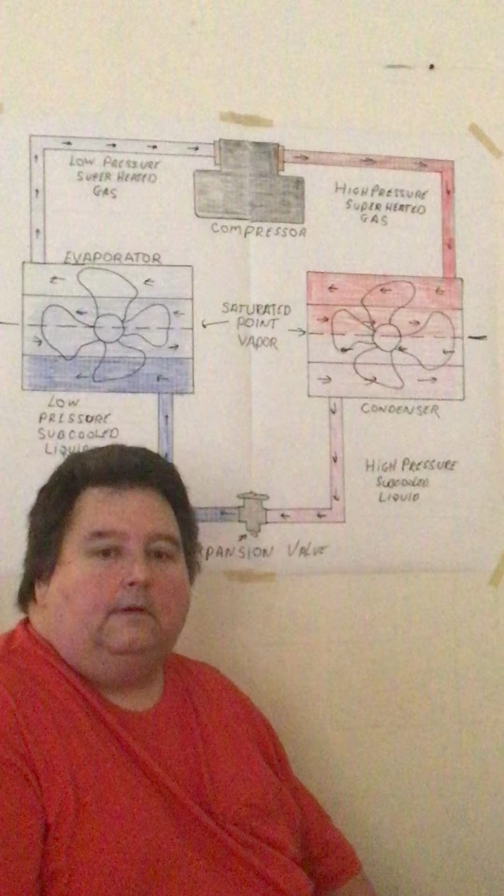This is a very basic refrigeration cycle. There's other things that can be added to the unit, to the system, but right now I'm just going to go over the very basic.

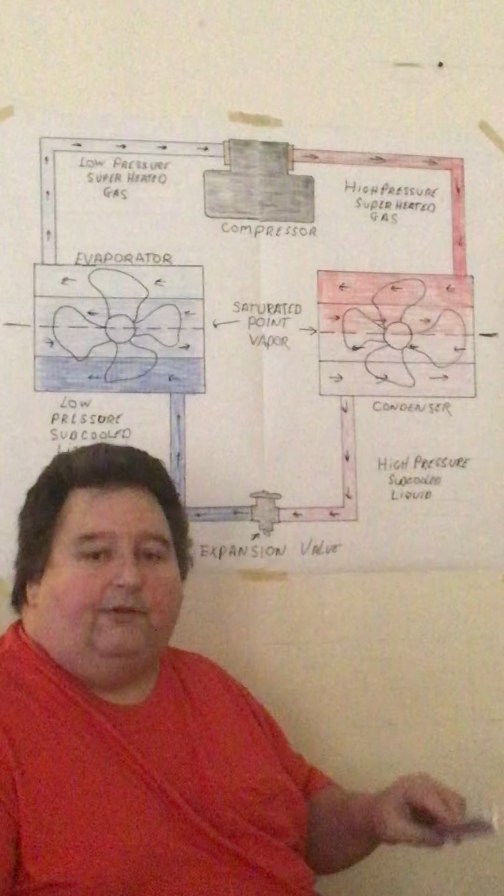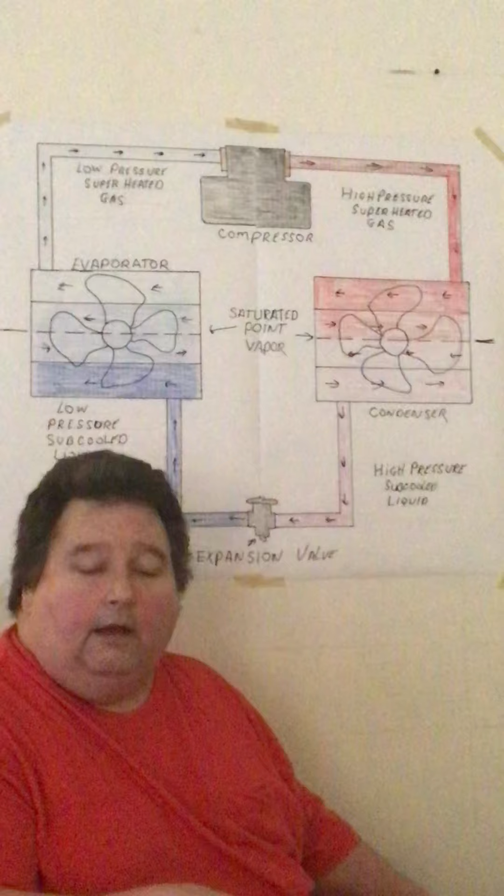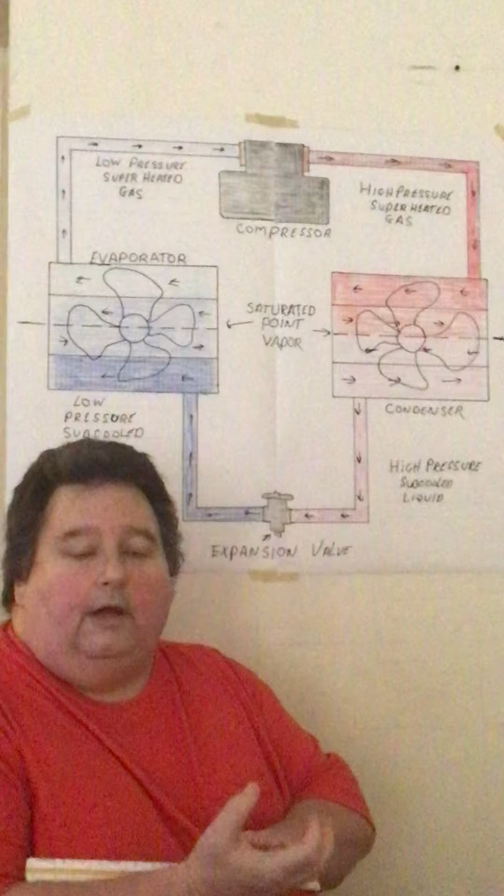So what I want to do first is tell you that there are four basic components to the refrigeration cycle: the compressor, the condenser, the evaporator, and the expansion valve or metering device.

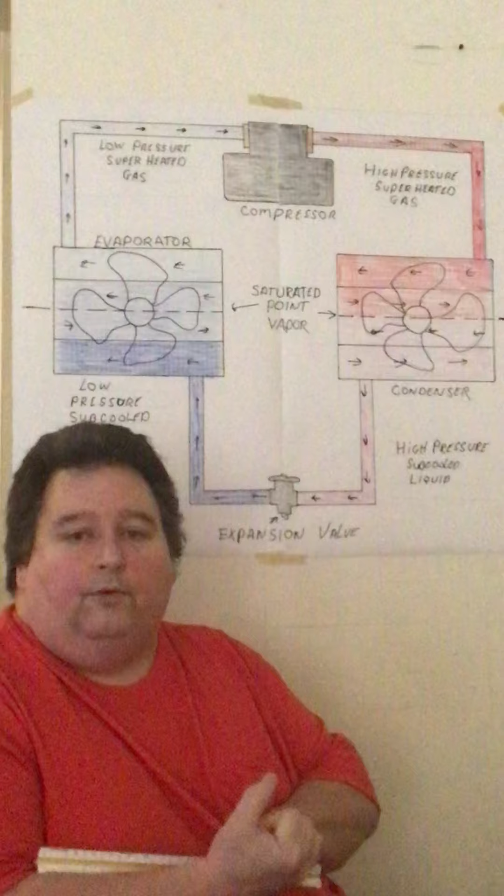The main part of refrigeration is the compressor. The compressor is like the heart of the unit. It pumps the refrigerant through the coils all around the system. Without the compressor pumping, the system is not working.

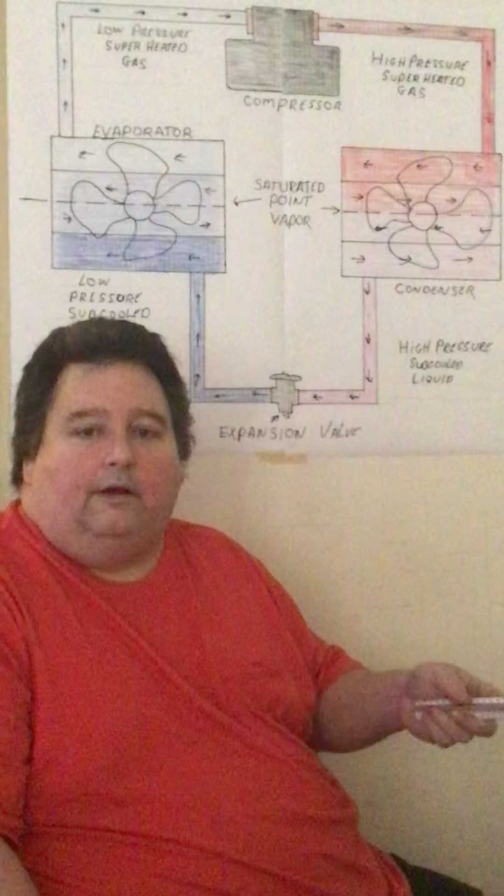So I'm going to start off with the compressor, which I drew up. I'm no artist, so forgive my drawing, but this is the compressor.

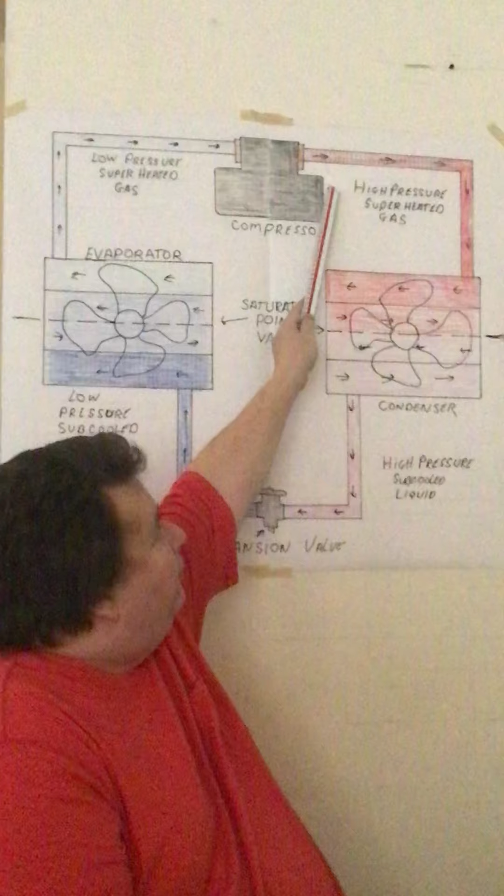On the outlet of the compressor, you have a discharge line, which gives you a high pressure, superheated vapor or gas. That's the state of the refrigerant.

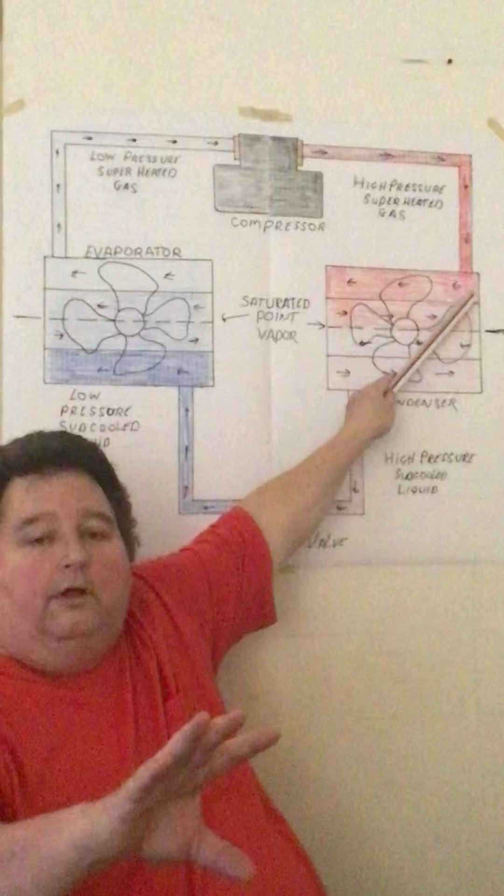As it goes through the discharge line, it enters the condenser. The condenser's main purpose is to remove unwanted heat out of the refrigerant.

So it comes in the condenser, through the condenser, and as it's going through, there's a fan, and the mechanical means is blowing the air across the coil.

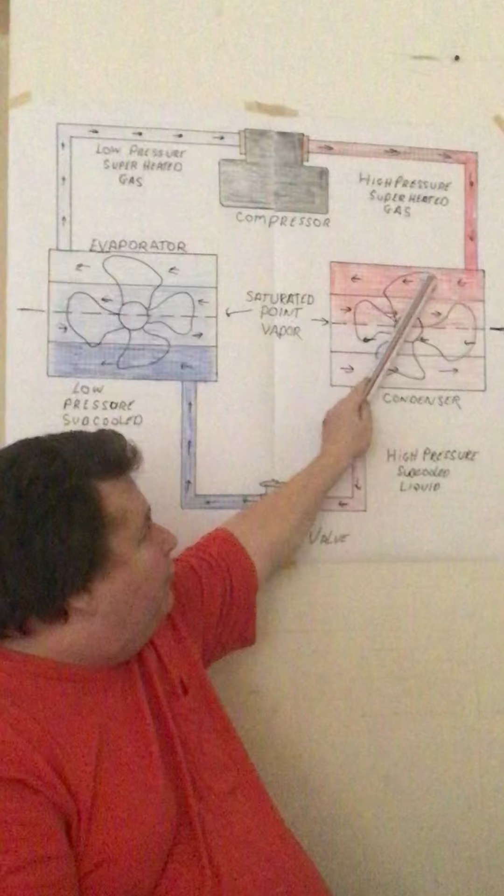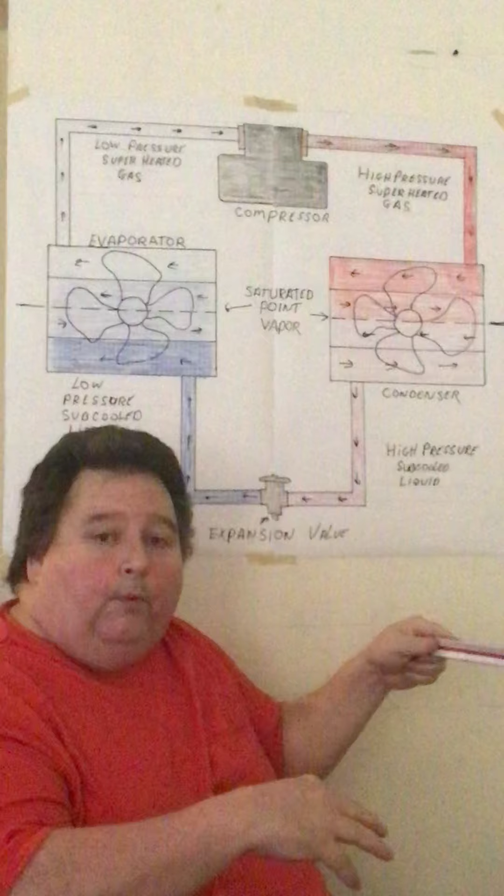As it comes through, what's happening is the refrigerant has a boiling point. All different refrigerants have different boiling points, which is the saturation temperature. So at this point right here, like I drew with the line, it's a saturation point, the point where liquid and vapor exist together in the refrigerant.

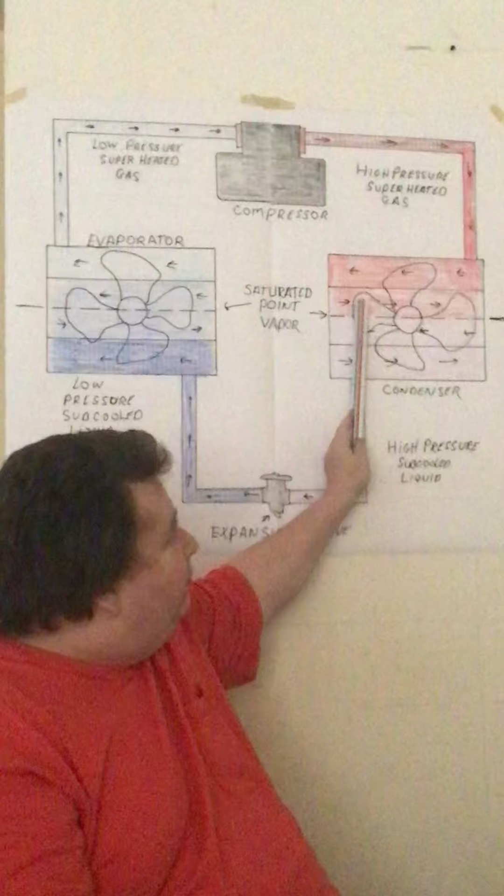So it's coming through here, and as the fan's going, it's boiling off. The refrigerant is boiling off. It keeps going down the coil, and the fan keeps blowing, removing more heat.

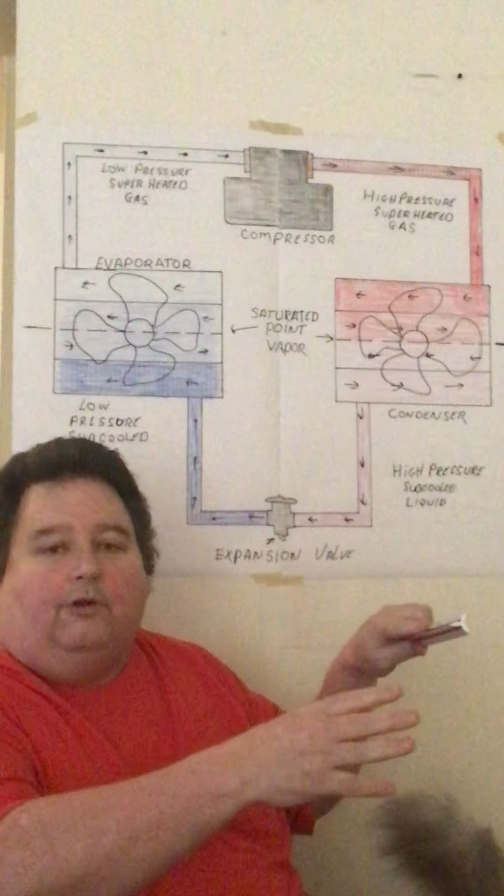That's called subcooling. Subcooling just means the saturation temperature minus the temperature of the refrigerant. You're subcooling it. You want to subcool the refrigerant.

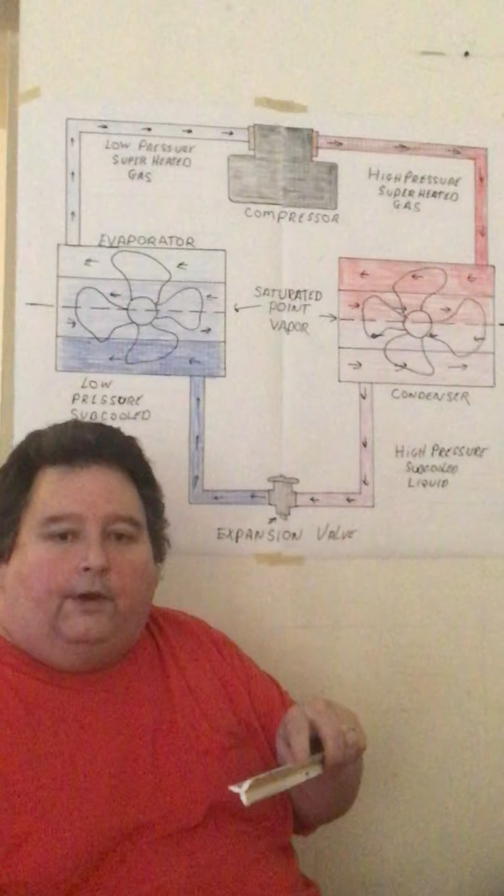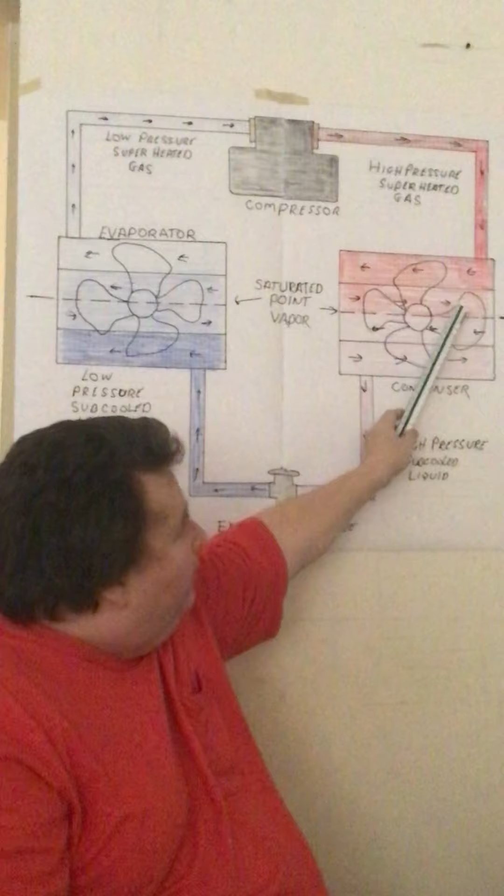The reason you do that is so you get full liquid. You want full liquid right here coming out of the condenser. So you have vapor coming in, superheated vapor, and it'll condense, it'll boil off.

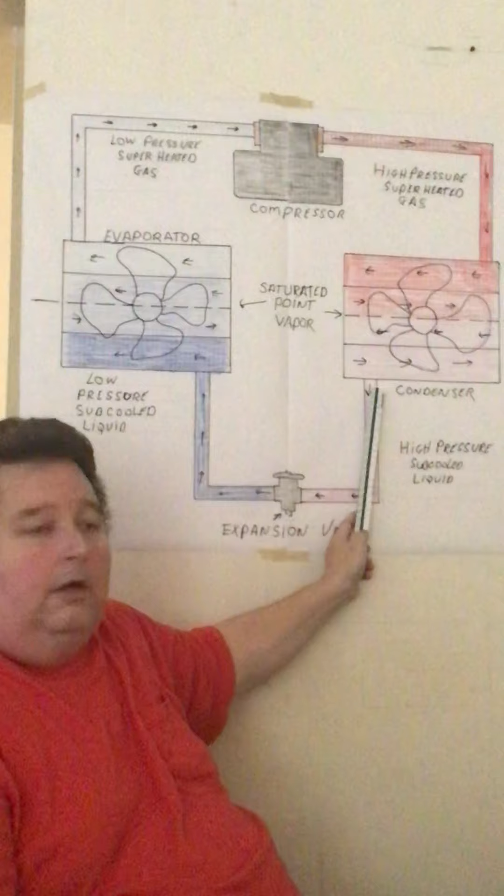With subcooling, it'll become a liquid, and as it comes down, it keeps producing subcooling temperatures of the refrigerant. So that guarantees that you have pure liquid coming down and going into the liquid line here, which is called the liquid line.

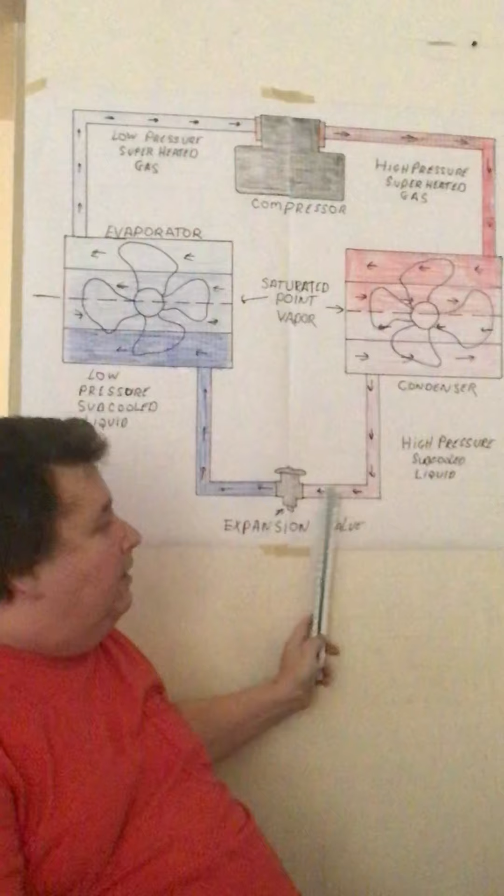It comes in here to the expansion valve. Now right in here, I didn't draw it, but all units have a filter dryer. The filter dryer's purpose is that when the refrigerant goes through it, it goes through screens.

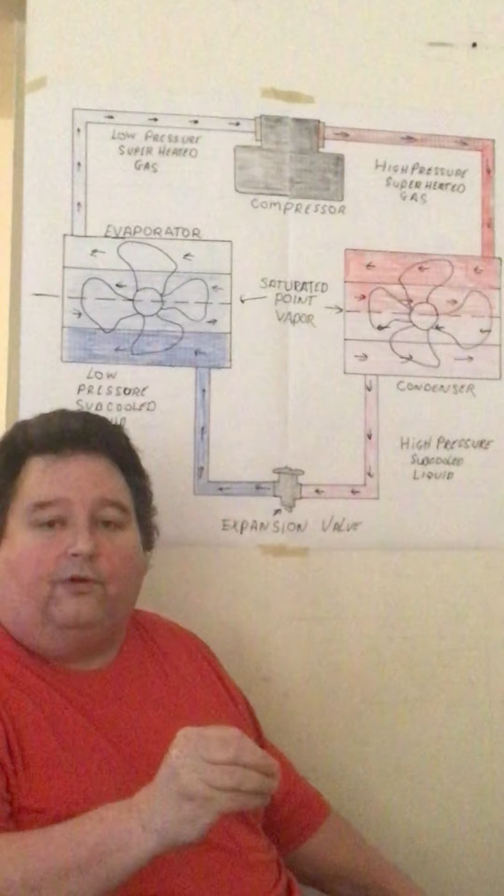What it does is clean the refrigerant and take all the little tiny particles out. It's almost like an air filter on your air conditioning, but for the refrigeration system, cleaning the refrigerant to make sure there's no particles.

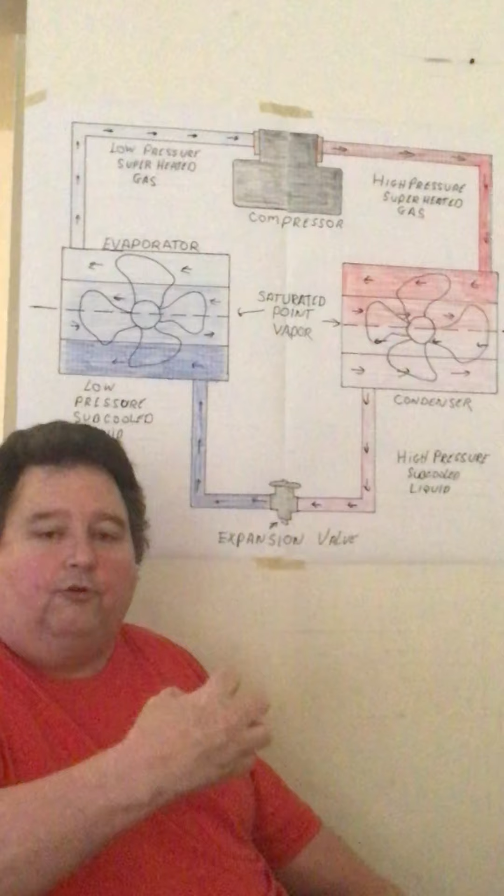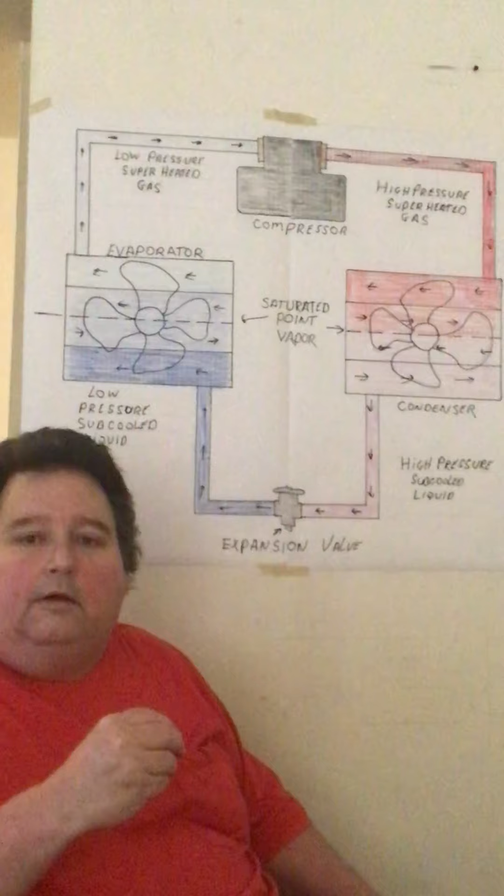Because what happens is if it goes through the liquid line here, and it enters the expansion valve, you don't want any sediment, because in that expansion valve there's a little orifice, or in the capillary tube system, the capillary tubes are very tiny.

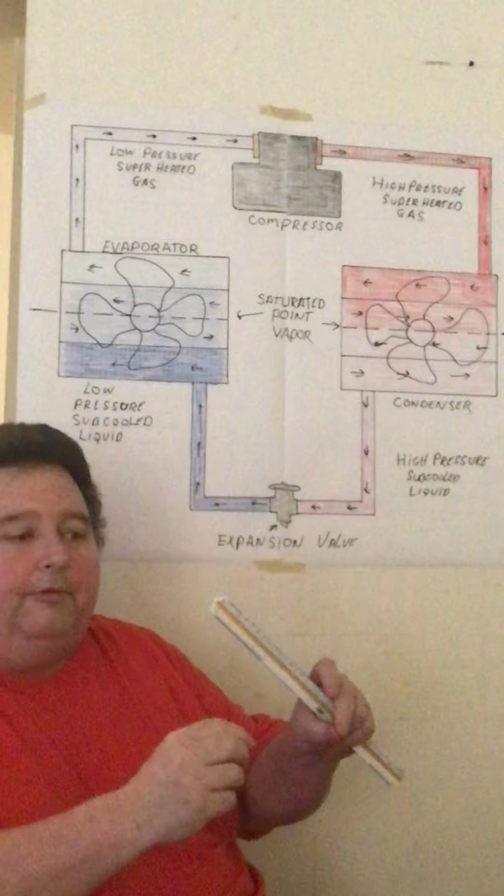So this here, the expansion valve or the metering device, this is where the refrigeration takes place.

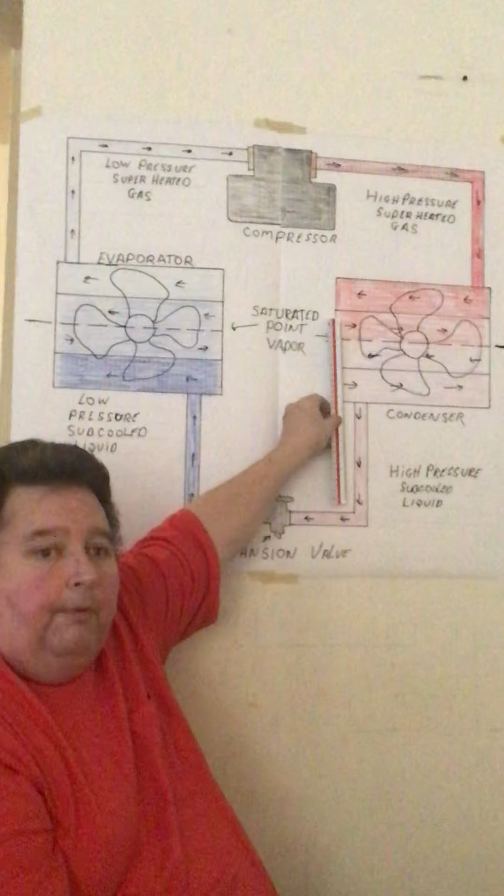This side here is your high side of the system. This is high pressure liquid and high pressure vapor. The expansion valve right here in the middle is the dividing line.

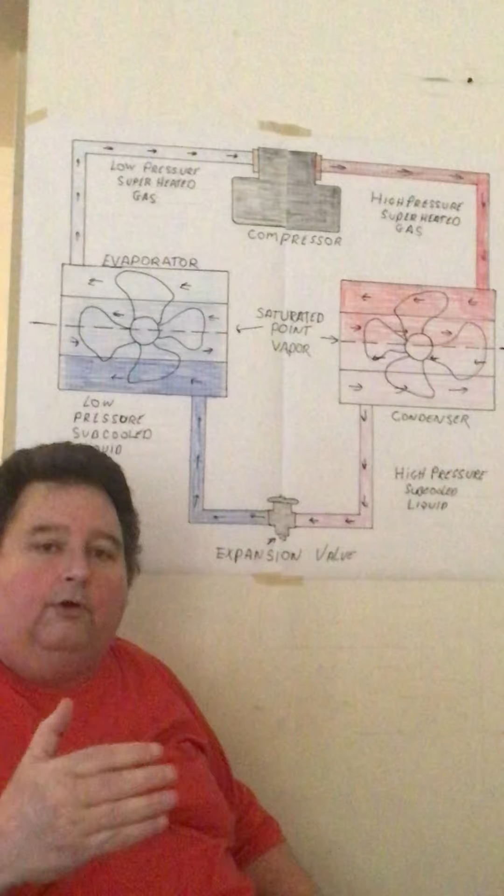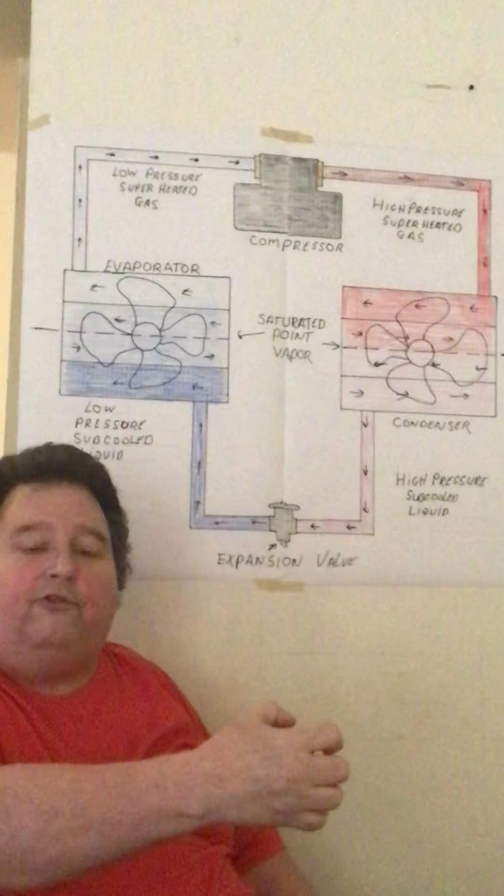This is where you change a high pressure into a low pressure, done with the restriction of refrigerant. Think of a garden hose: when you squeeze the nozzle, it spurts out real fine. That's the same thing happening here.

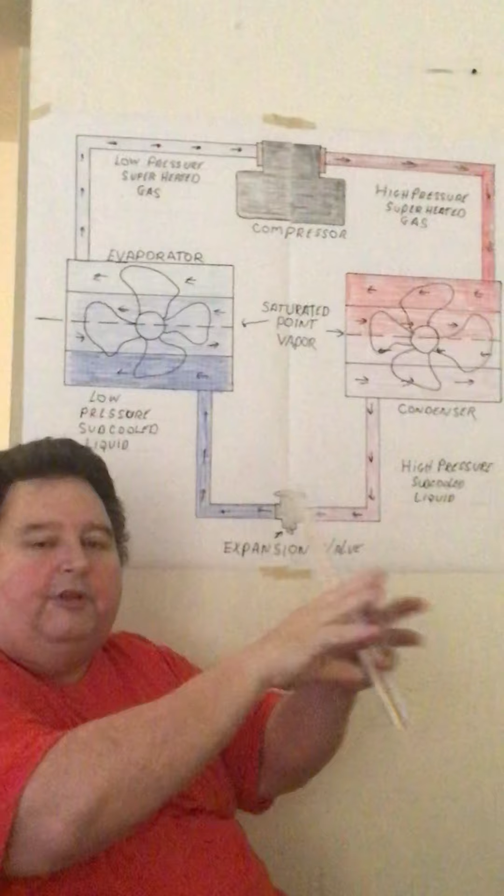It's taking the refrigerant, all the liquid droplets and everything are going in there, and comes in through here. Just remember, this is high pressure here, and the other side of the valve is low pressure.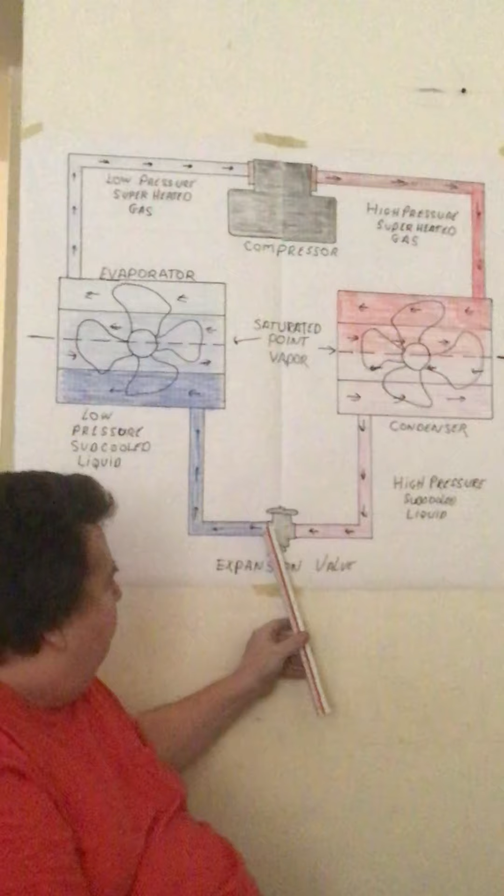So now you have low pressure, low temperature, and this is still liquid right here. This is a blue line, cool to the touch, and it's liquid. That's because of the restriction here in the expansion valve.

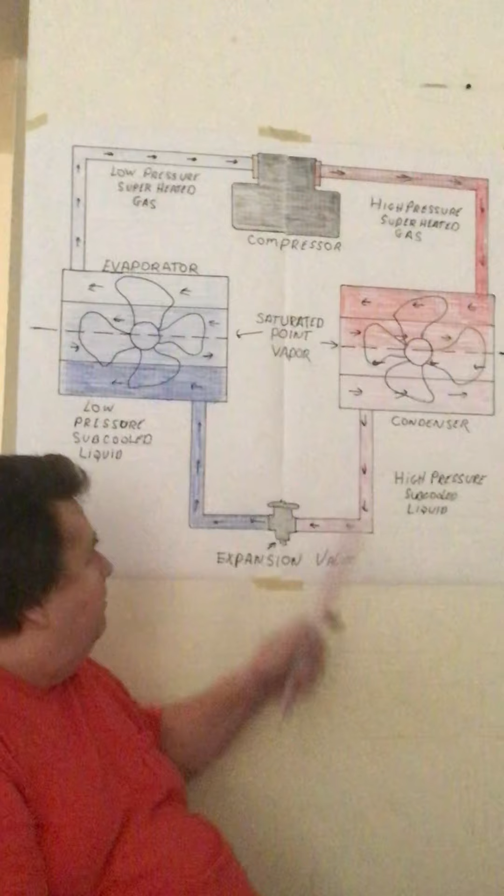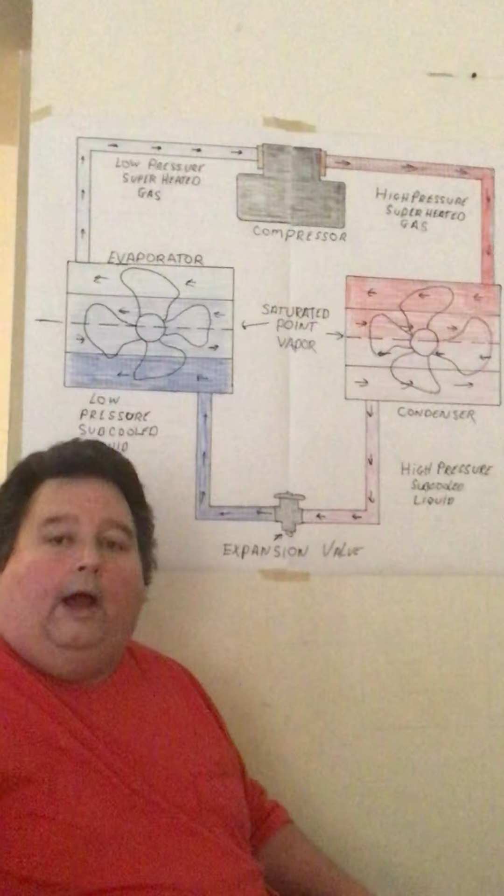So the line comes in through here, all the way around, and it goes into what right here is the evaporator. The evaporator is where all the cool refrigerant is that makes your refrigerator box cold or your house cool. That's what gives the cooling power of the refrigeration or the air conditioner.

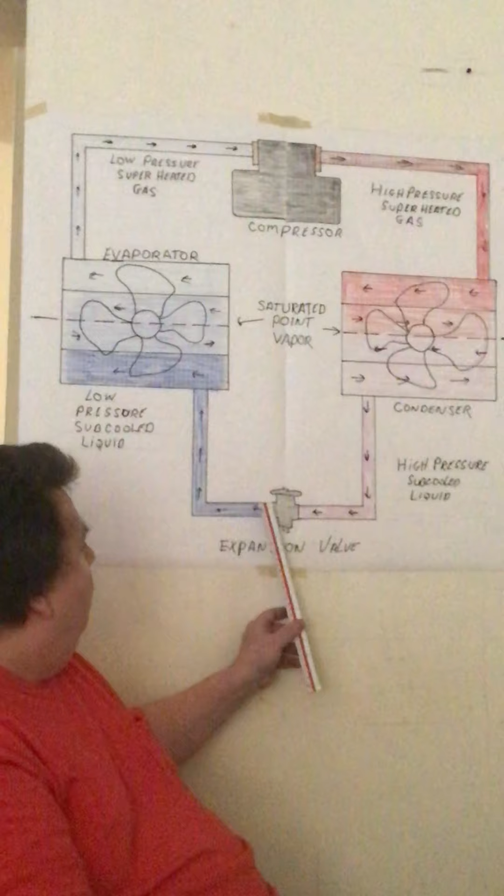It's all done with this little valve here. So this is all low pressure, low temperature, but still it's a liquid. So the liquid comes into the inlet of the evaporator, and it travels.

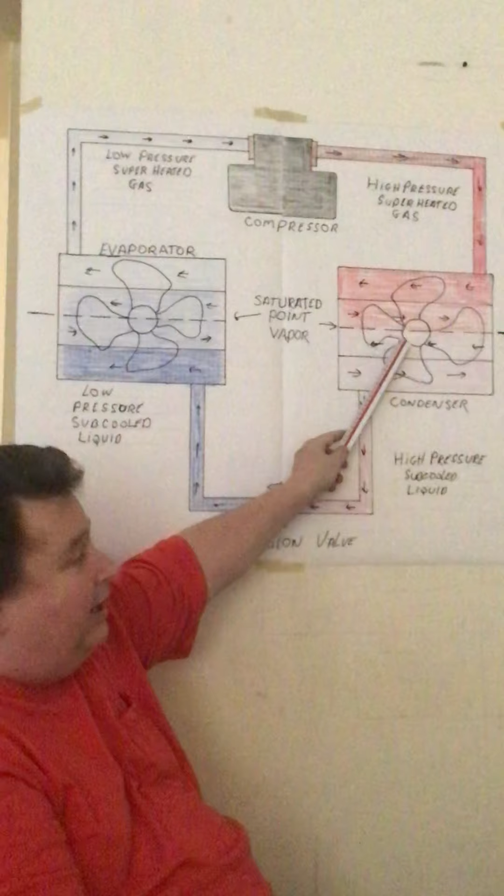It comes through, and look what you got here, you got a fan. So the fan in the evaporator is doing the same thing it does in the condenser. But here, what you're doing is you want to superheat, you want to add heat to the refrigerant.

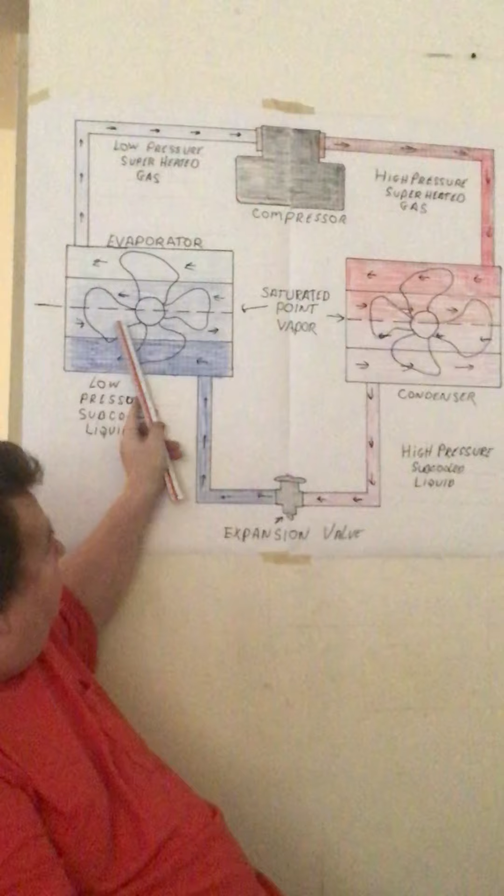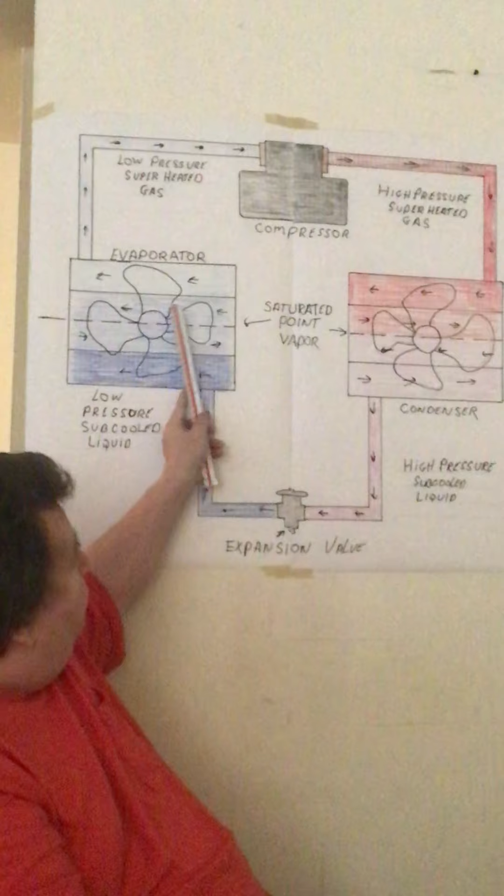So what's happening at the saturation point of the refrigerant is it's boiling off. Because of the fan, the refrigerant lines are absorbing heat from the ambient temperature around the coil. In this section, the refrigerant is boiling off into a vapor, going through the coil, all the way up. Right now you're at vapor.

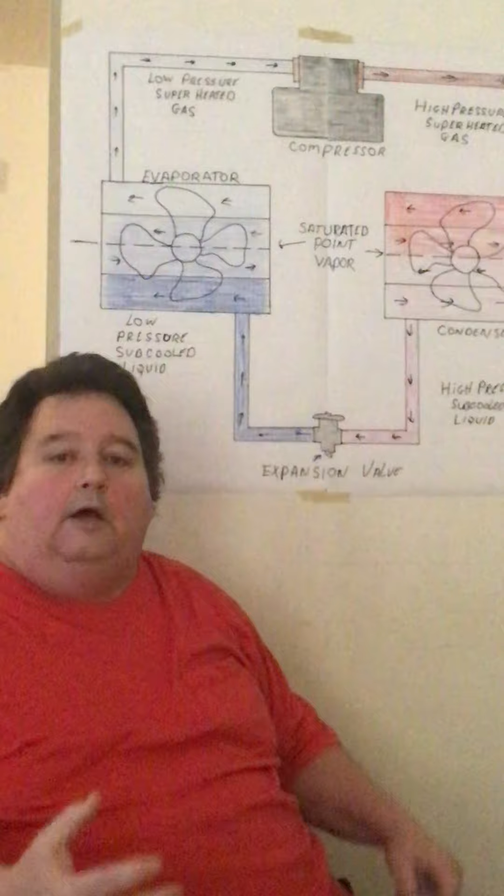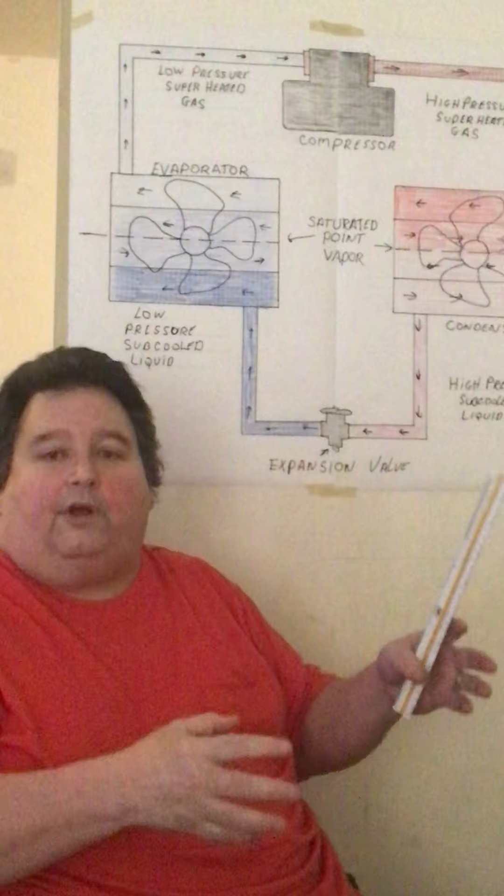You have vapor. Now the tricky and most crucial thing is that you have to superheat the refrigerant. By superheat, I mean you need to add heat beyond the boiling point of the refrigerant. Later, when we discuss temperature and pressure, this will make more sense. But for now, you boil it off and you have vapor.

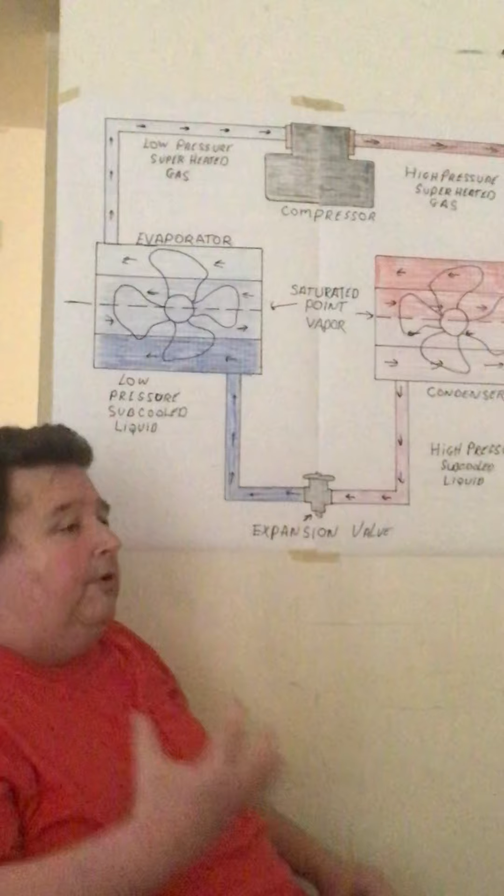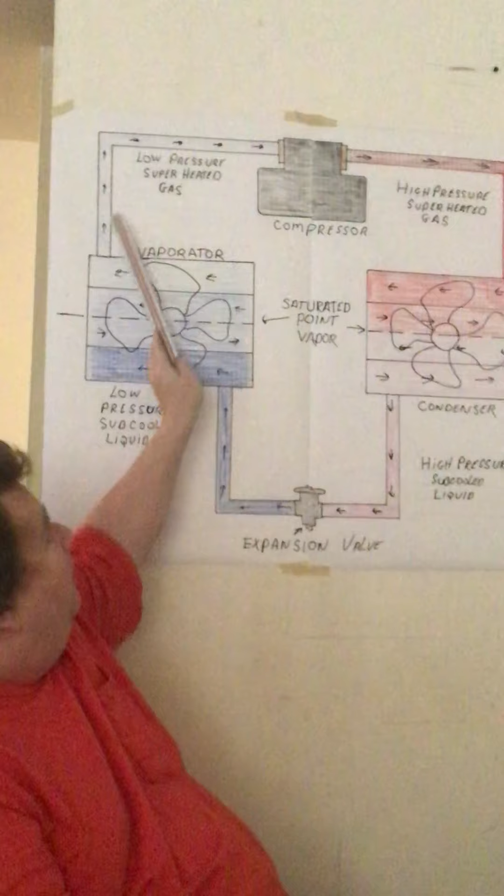As the refrigerant goes, you keep gathering more superheat. You don't want too much superheat, but you have to have enough that this is vapor. It comes out of the evaporator into the suction line as a low pressure, superheated gas, and travels through the suction line all the way back to the compressor as a low pressure, low temperature, superheated gas.

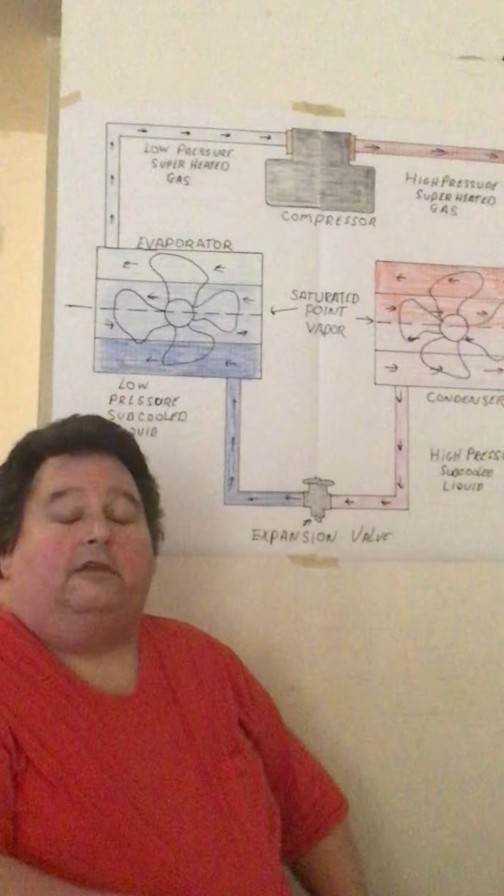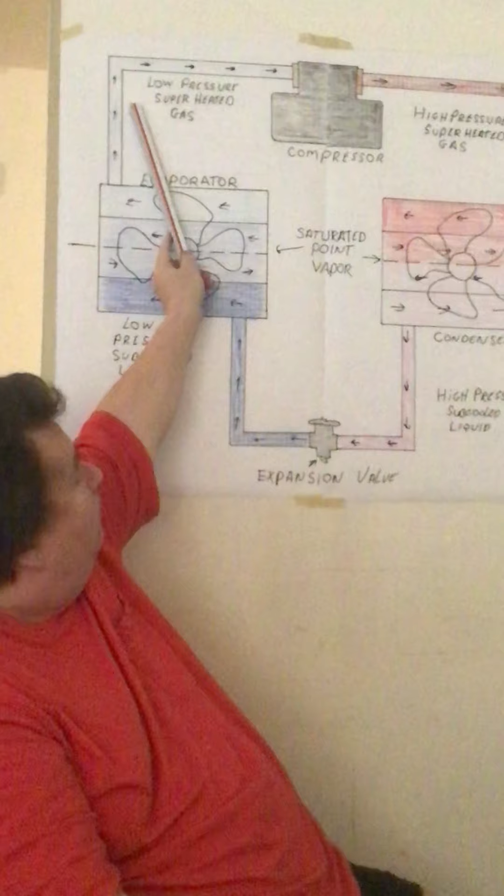The thing about superheat is you need it because you don't want any liquid refrigerant going back to the compressor. That's one of the worst things that can happen. If you have too much superheat, the compressor is going to overheat because you're not getting enough refrigerant back, since the refrigerant is actually what cools the compressor down.

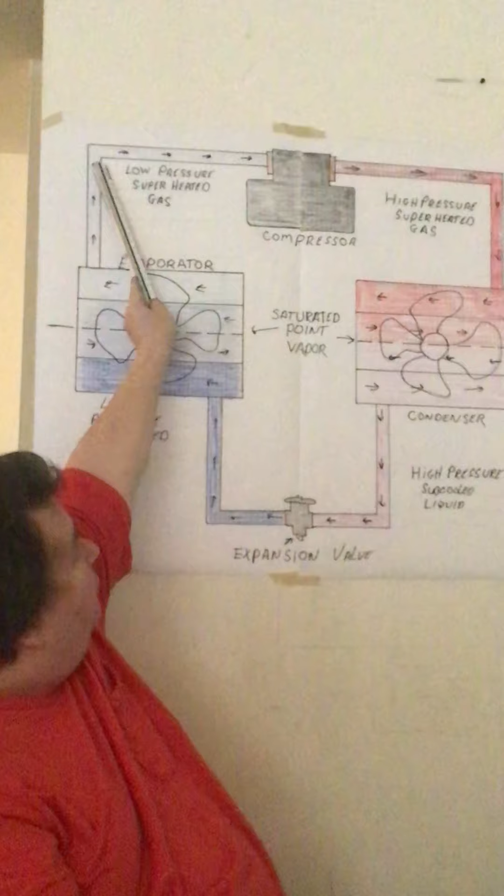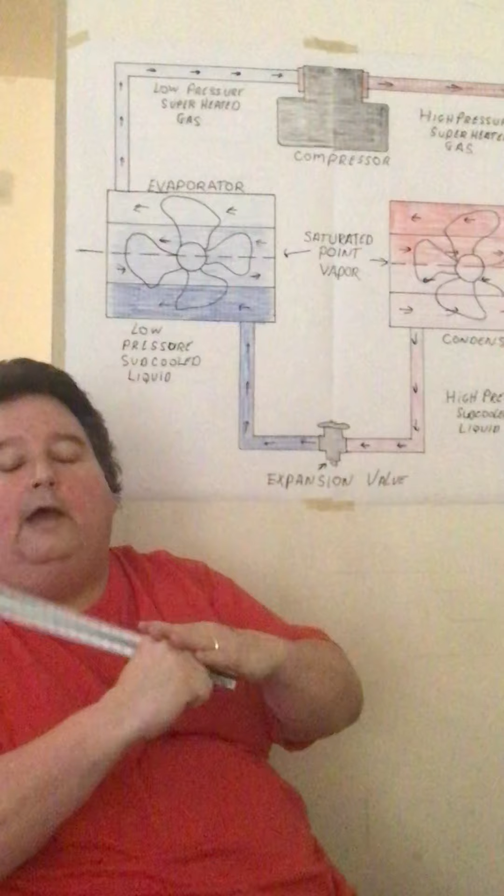So if you have too little superheat, you have too much liquid, and instead of vapor, the liquid level will be too high. That liquid is going to go into the compressor, and that's called slugging, which is no good. The compressor has pistons with two valves that go up and down like in a car. If liquid goes in there and the piston tries to compress it as pure liquid, you're going to damage the valves, and also the piston, but mainly the valves.

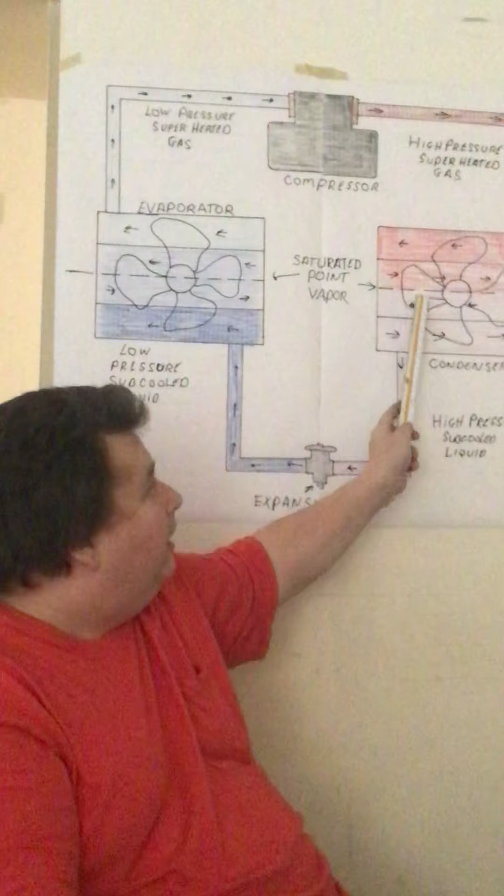So it's very important, and we'll go over this in more detail when we start the lessons, that subcooling and superheat are very important in diagnosing a unit. When you put your gauges on, you can see inside the system, reading the pressure and temperature of the refrigerant. It's almost like a doctor's x-ray, seeing inside the system what it's doing at the condenser and the evaporator.

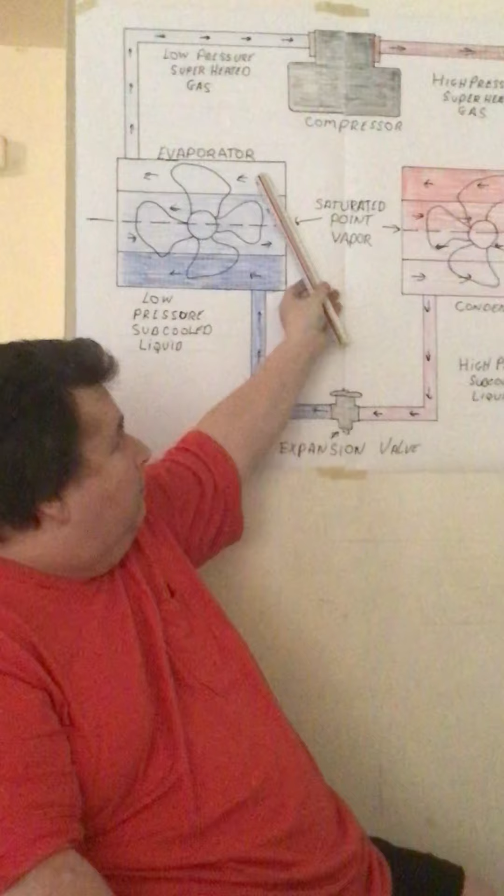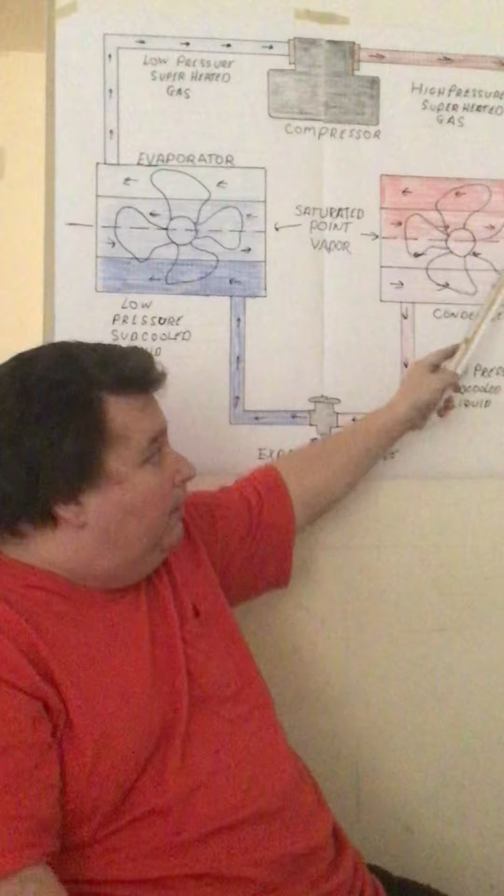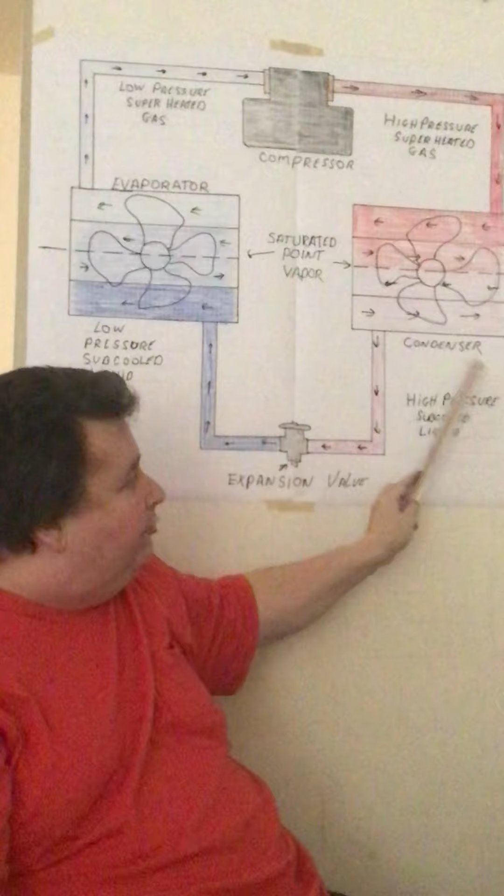Too little refrigerant or too much refrigerant is bad. If your fan motor goes bad, or you have a dirty coil in the condenser, you're not going to have enough airflow going through the condenser, and the condenser isn't going to act right. The saturation point won't be there, and you'll end up with liquid, vapor, and liquid coming back to the expansion valve, which is no good.

So this is the basic refrigeration cycle.

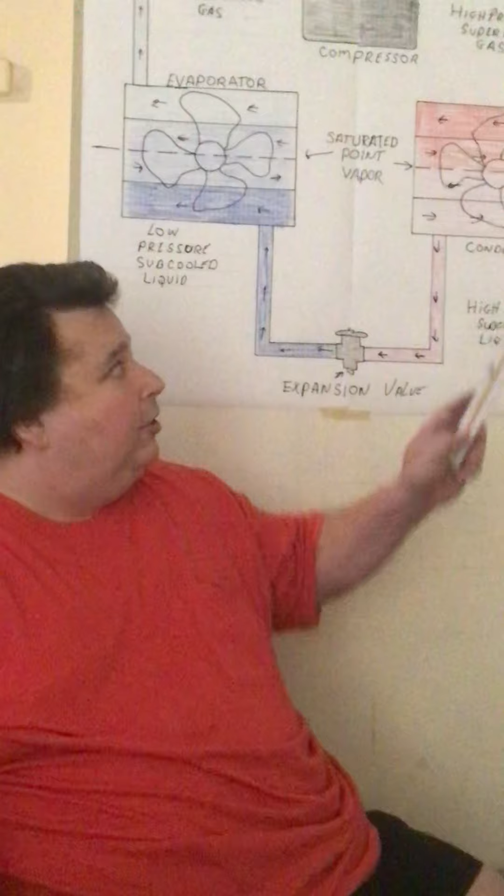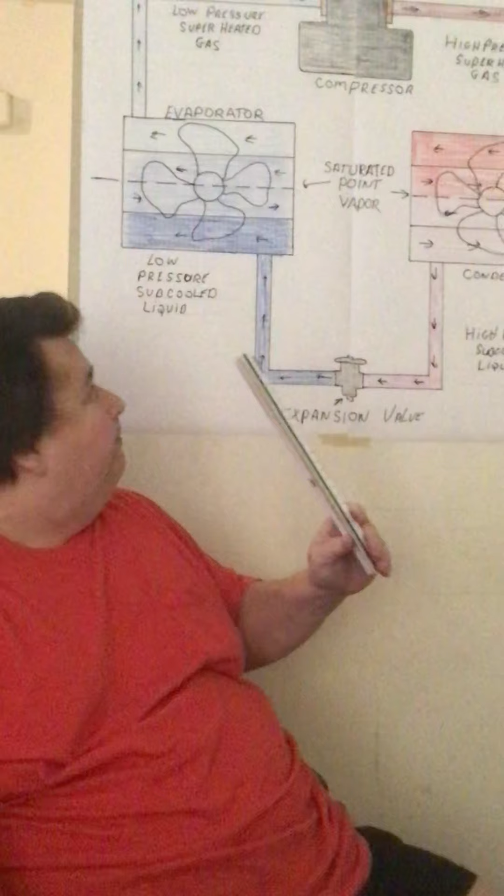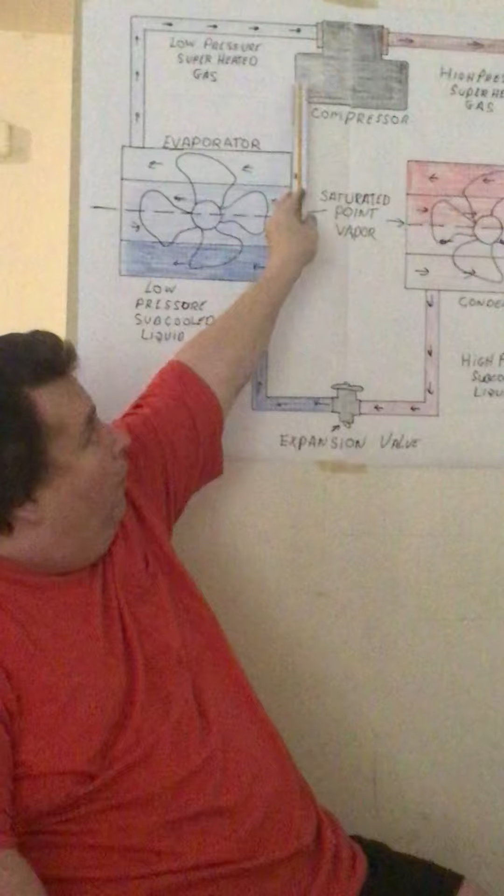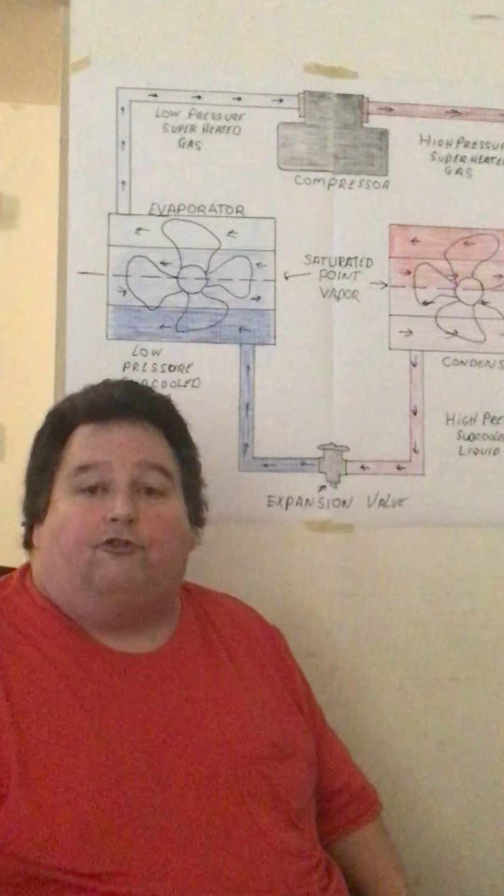Other than that, just remember there are two sides of the system, a high side and a low side. This will be gas, liquid, and then gas. So you always want gas, or vapor, on both sides of the compressor. That all depends on how your refrigerant is charged. You put your gauges on, and you can tell just by looking at them what the unit's doing. That's pretty much it with the basic refrigeration cycle.